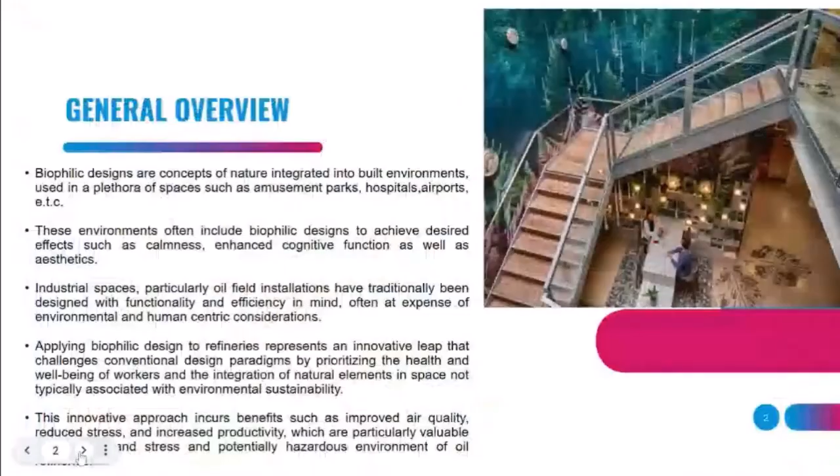So first of all, what are these biophilic designs? Can everyone hear me? Sorry. Biophilic designs are generally concepts of nature which are integrated into built environments, and they are used in spaces such as hospitals, schools, airports, homes, and hotels. These environments that include biophilic designs are used to achieve a desired effect, aside from creating or enhancing the aesthetics of the environment.

They also bring effects such as enhanced cognitive functions, calmness, and reduced fatigue. So incorporating these designs in industrial spaces is actually unique, not exactly common. We want to fill that gap because we believe that by applying biophilic designs into these spaces, it helps workers who are usually faced with repetitive and strenuous tasks.

To also experience these calming effects and enhance cognitive functions, which is necessary in their work, and also to help the environment in a sustainable manner. So incorporating this into refineries, we are challenging the traditional design paradigms by putting the health of these workers at the front line. This innovative approach helps us improve the air quality and increase productivity by enhancing their cognitive functions. They are particularly valuable in potentially hazardous environments such as these oil field installations.

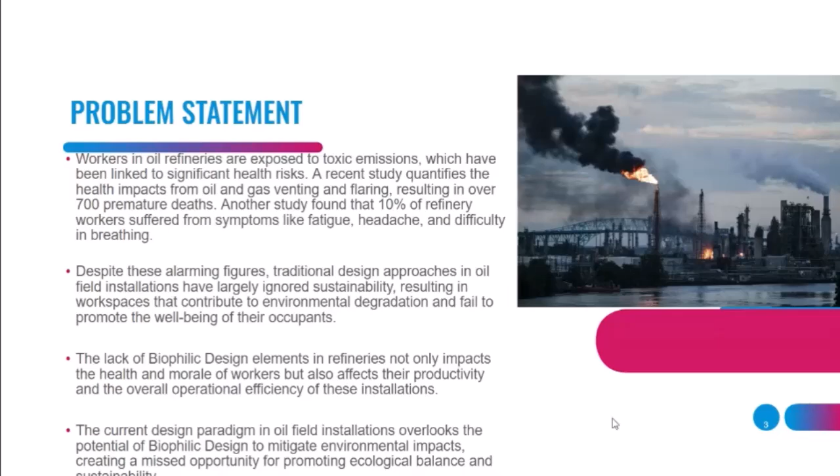We could incorporate biophilic designs, which is a way of bringing organic architecture into the oil patch, increasing the health and morale of workers, letting them see a reason to come to work happy, not just for the salary. This design will also help mitigate environmental impacts and create a good ecological balance and a sustainability effect. Then for our objectives...

We'll conduct extensive literature review, which has given us insight to integrate these designs into existing oil refineries. Our second objective is to improve employee health and productivity, reduce environmental impacts of air pollution, and also enhance the visual aesthetics of the environment.

Is it Pattern 7, which is connection with natural systems? Is it Pattern 12, refuge, prospect, mystery, and the rest? Once we determine that, we'll move into our design and implementation. Then after implementation, we will monitor and reevaluate.

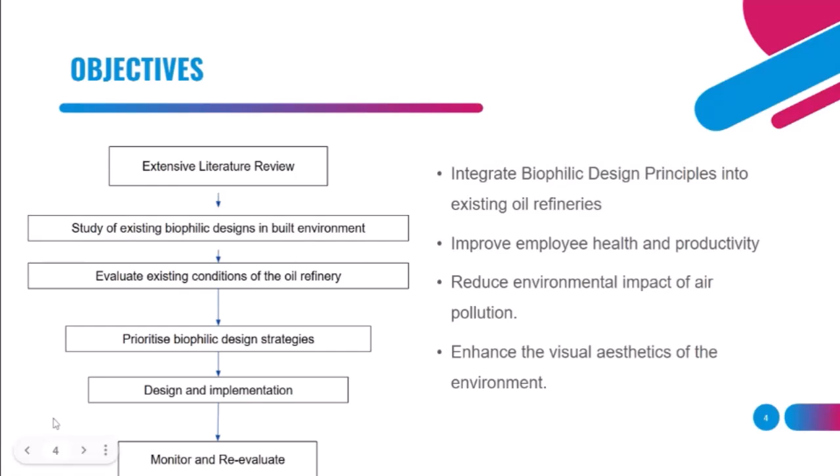According to the reviews and research we've done, we've seen that biophilic designs are built most especially into homes, hotels, hospitals, schools, amusement parks, airports, and offices, but they haven't actually been implemented into facilities like industrial facilities. This is the gap we hope to fill.

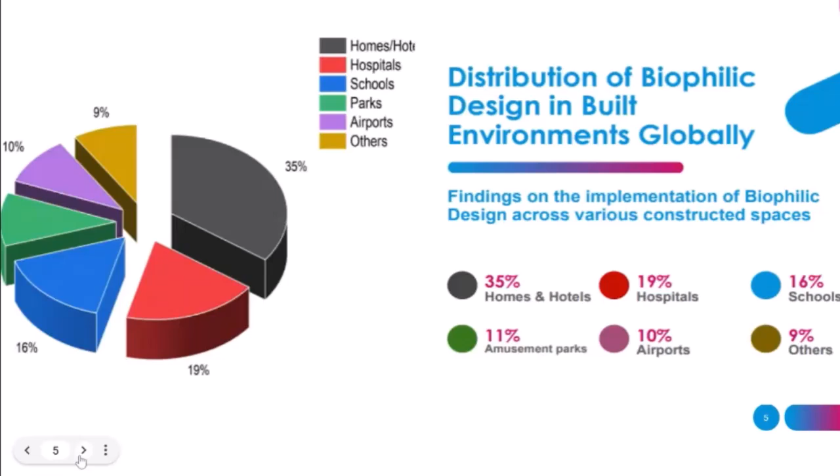You can see the pie charts whereby there's an uneven distribution of the integration of biophilic designs into these already built spaces. So my partner is going to take us on this integration and why we are going to integrate this into oil field installations.

Naya? Yes, thank you very much, Chiwetalu. So I'm going to be speaking on the drawings here. We are proposing to integrate biophilic design, focusing on P1, which is visual.

Examples of those indoor spaces include cafeteria, resting room, and conference rooms, and examples of outdoor spaces include the walkways and the drive-throughs. For indoor spaces, we propose to use allergy-friendly plants indigenous to the ecosystem in that environment. For outdoor spaces, we propose to use plants with high air pollution tolerance capacity, which can serve as carbon capturers and sequesters, and also enhance the aesthetics of both outdoor and indoor environments. Thank you very much.

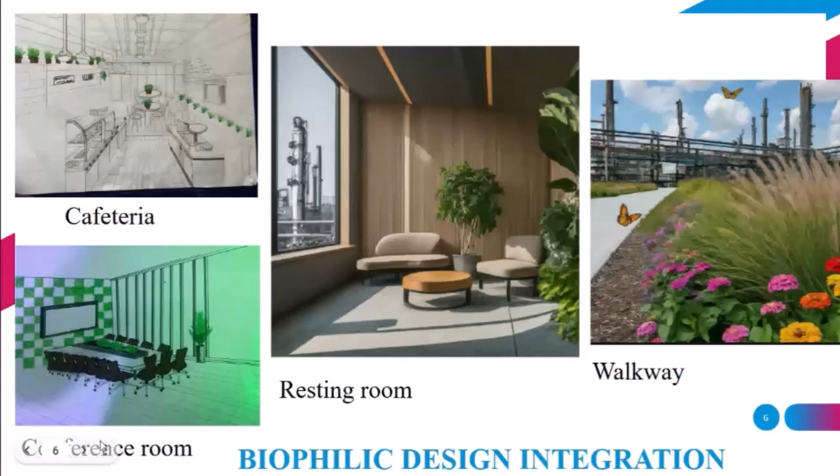Okay, so I'll take it from there. We have the key beneficiary of this research, which are the employees, by helping them in their health and enhancing their cognitive functions. This will also be enhancing the environment.

This benefits companies who want to maintain their environmental reputation, so they wouldn't want to be seen as people that destroy ecosystems. This will also be beneficial to the community in that environment by making them inclusive, bringing the indigenous plants to help enhance the greenery of both indoor and outdoor spaces.

Our relevant sustainable development goals: our research resonates with 4 major SDGs, which are SDG 3, 11, 13, and 15. SDG 3 talks on good health and well-being, which are very crucial to the workers working there. It also enhances sustainable cities and communities, encourages climate action, and encourages life on land, which also encourages biodiversity. Thank you, everyone.

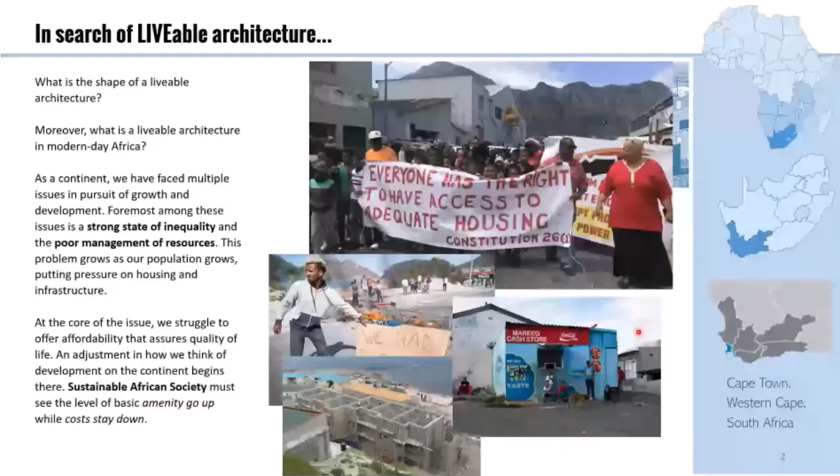So the issues endemic with inequality revolve around differences in engagement levels, differences in inclusion. There's a level of difficulty in accessing health and security. And of course, integration is extremely difficult if you are starting off in different areas and at different levels of accessibility.

And of course, there is a lower willingness to invest in an area that has these issues. So we need to look at a shift from a shallow ecology, where man is above the environment and there is a reliance on technical solutions and the management of the environment as an administrative task.

Instead, we need to look at a deep ecology where man is part of the environment and has veneration for life, all life, and attempts to achieve a complete symbiosis.

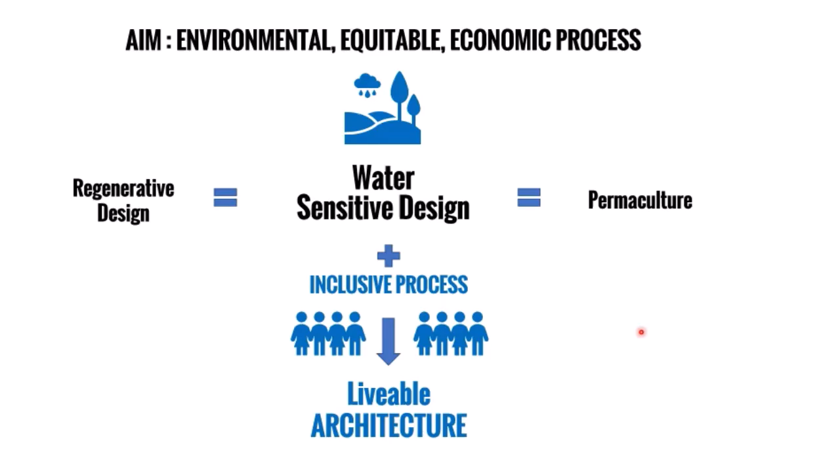So with that aim in mind, towards an environmental, equitable economic process, I managed to identify water-sensitive design as part of permaculture, part of regenerative design, but with the addition of inclusive processes, we can then achieve a more livable architecture, a livable approach to architecture. And this is a diagram where I look at theoretically how livable architecture would sit within.

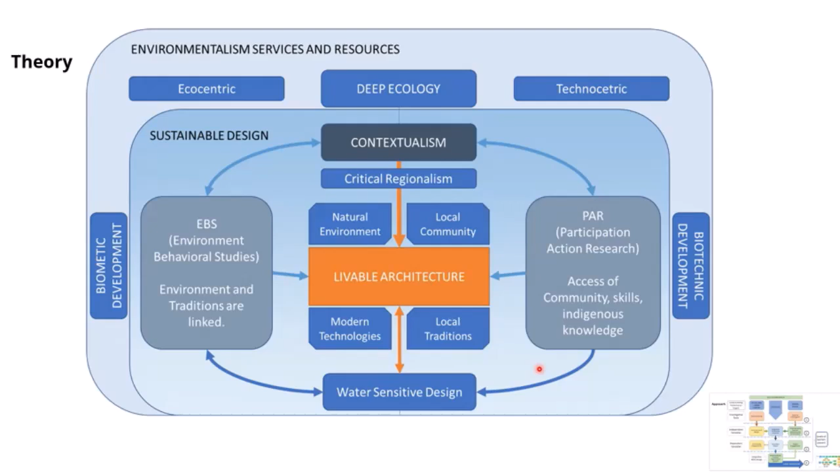It is something that I imagine is easily connected to water-sensitive design, environmental behavioral studies, and participation action research, but it kind of sits at the junction of all of these elements while being critical to the region, and of course speaking to the natural environment, local community, modern technologies, and local traditions.

And the approach that I took, the methodology adopted, was to look at four steps towards a livable architecture, where water-sensitive design is a key driver.

To get to that point, I looked at understanding the performance targets present in media and literature reviews. I looked at investigative tools such as baseline investigations and data gathering. I looked at independent variables, and then dependent variables, which were community engagement and expert engagements.

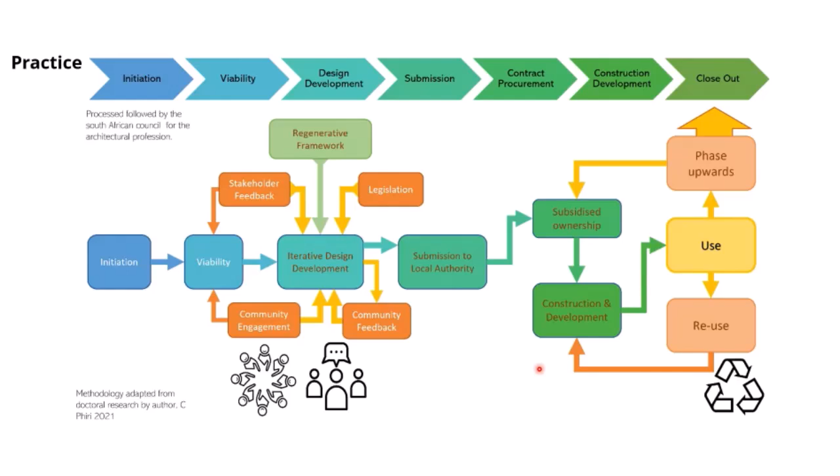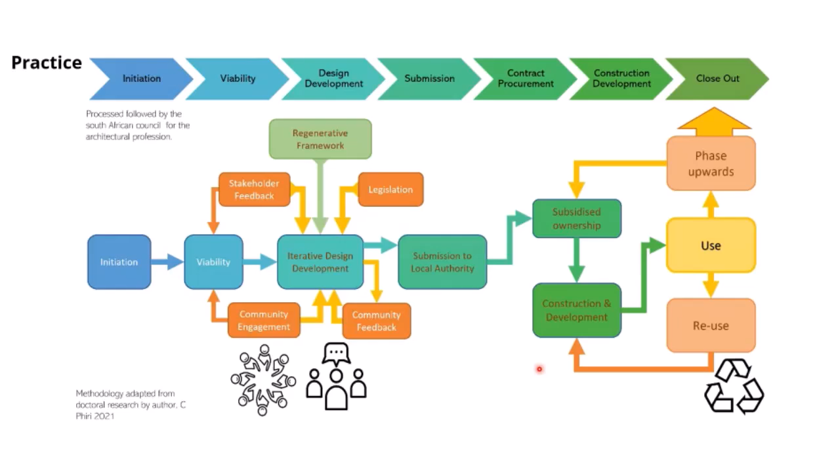That took the form of a redefinition of practice, and how you can move from initiation to closeout traditionally, versus how you can move into initiation, viability, and iterative design development, using community engagement to reframe how to approach design. I also looked at how that could lead to a circular economy and how you can get into use, reuse, and phasing upwards of design.

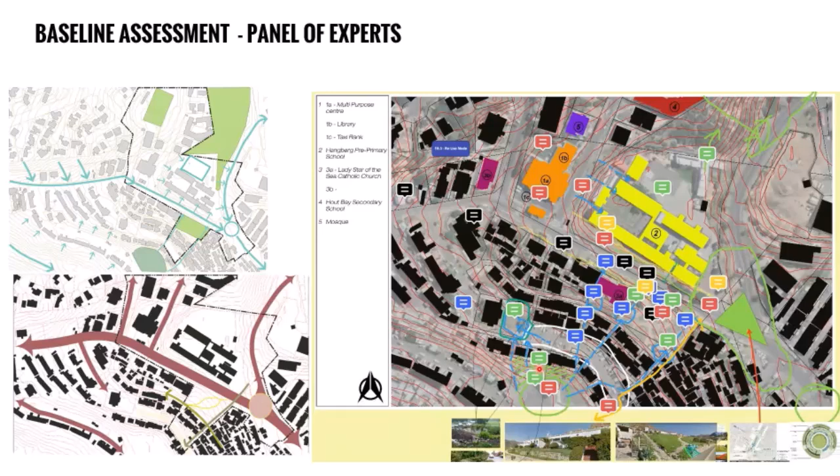We then got a panel of experts together, and there was a discussion over the different elements of the area that could benefit from water-sensitive design, as well as identifying areas that were important and areas that could be linked with intervention.

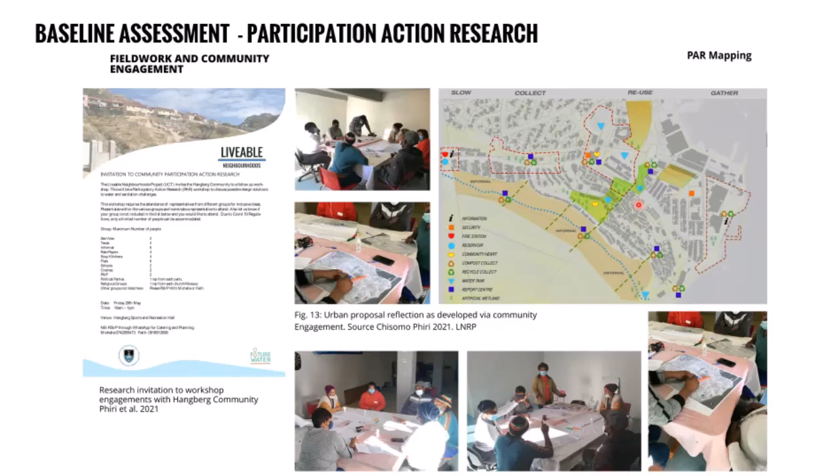I then engaged with the community, well, with residents and members of the area. Together we managed to create a revised diagram that looked at all the different levels of engagement with the area. That took this shape, where we looked at layers of information, security, fire.

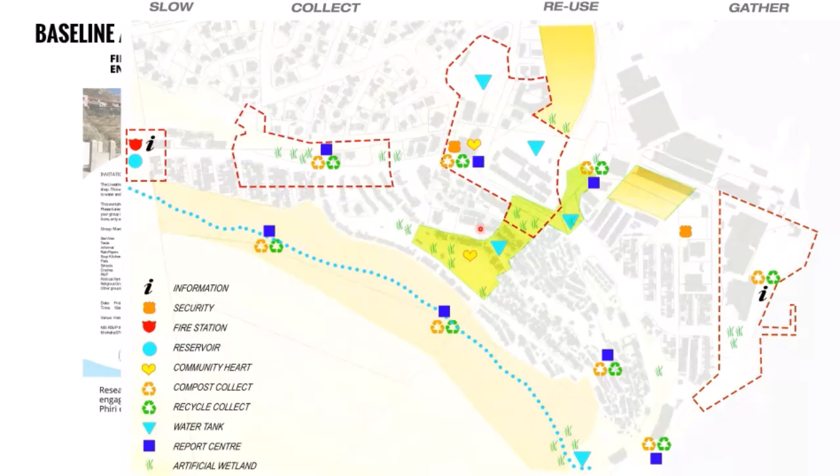We looked at the possibility of implementing fire stations and how that could be received. We looked at opportunities for reservoirs and community, and identified where the community would center its activities, and then we looked at recycling methods, water retention methods, and possibilities for artificial wetlands in the area.

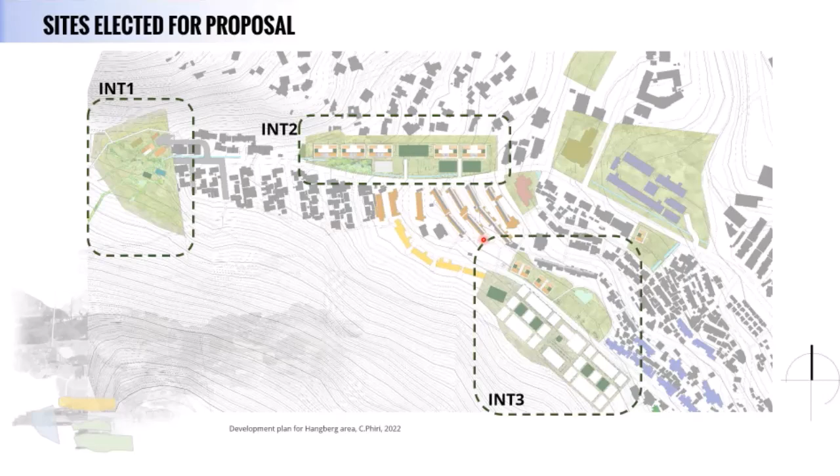That resolved itself into a series of proposals, which I named Intervention 1, 2, and 3. Intervention 1 is a complex system that connects to the environment as a threshold intervention.

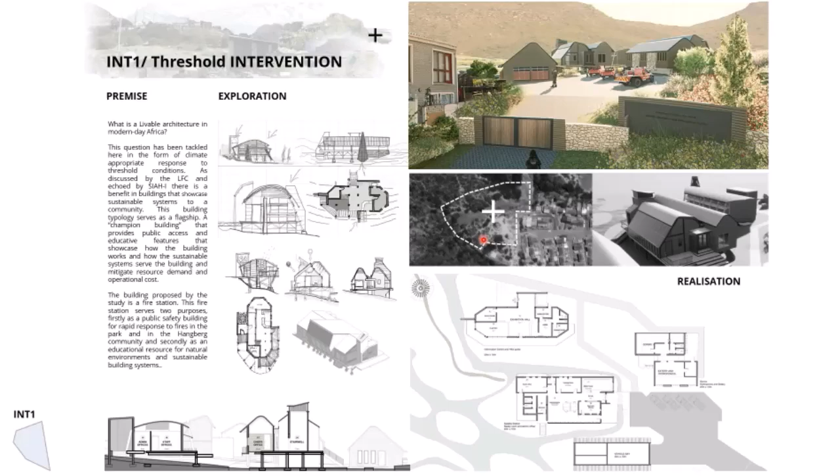This threshold intervention has an information center, a satellite fire station, and how those systems would work with a dormitory to allow for training as well. This was designed as a building that would touch lightly on the environment and would integrate sustainable systems and sustainable materials, so you can consider this a flagship for the project.

I'd imagine this as something rolled out as phase 1. And then we would move into phase 2, where there would be transitional interventions, allowing people to move into these buildings that would be phased up.

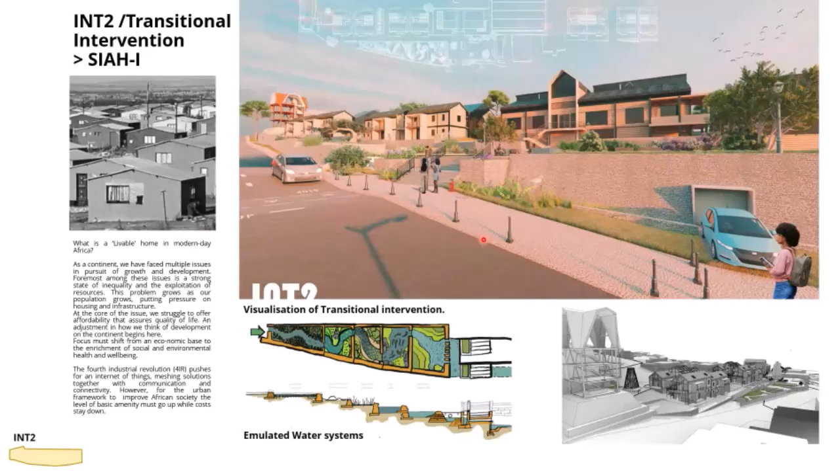These are called the SIAH-I livable units. Those units, identified in yellow in this diagram, would have a series of levels that can be integrated and developed depending on the use of the family that's involved.

This district was also allowed for an activity hall and a youth center. These were programs identified by the community as things they needed, things that would benefit the area, as well as a police station with an observation tower that also acted as a green agricultural intervention.

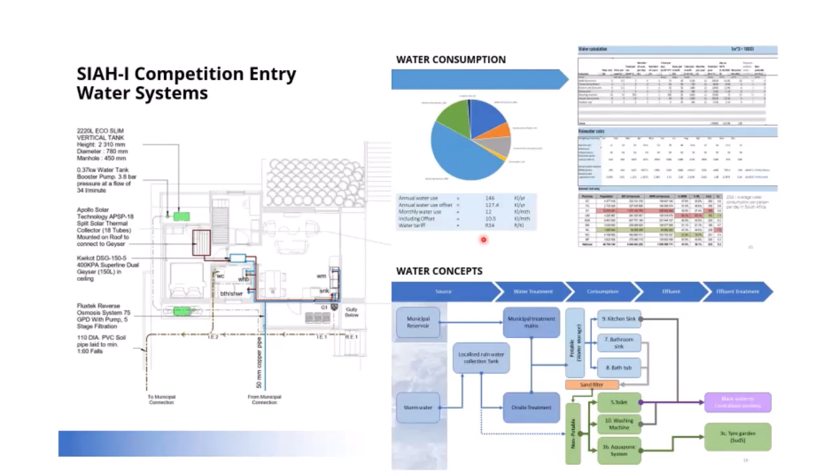The SIAH-I livable units have 3 phases, as you can see here. These are the systems in use, where we quantified the amount of water retention as well as the water administration, how much savings could be calculated in one unit, and then how that could be carried forward.

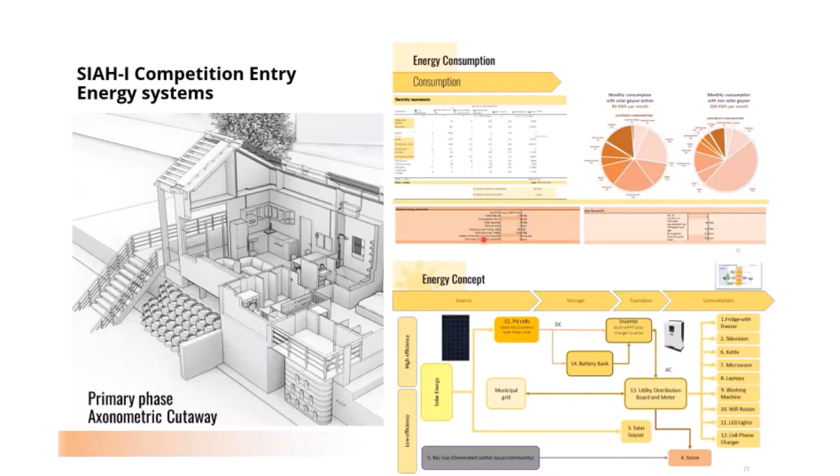The same was done for energy, where savings were identified in terms of using a solar geyser as opposed to not using one, using a centralized system so you cannot rely on existing power systems. There was also identifying public buildings as energy sources for the entire district. This is an analysis of the sun hours and kilowatt hours of exposure present on the youth center building, which would then act as a power generator for that area.

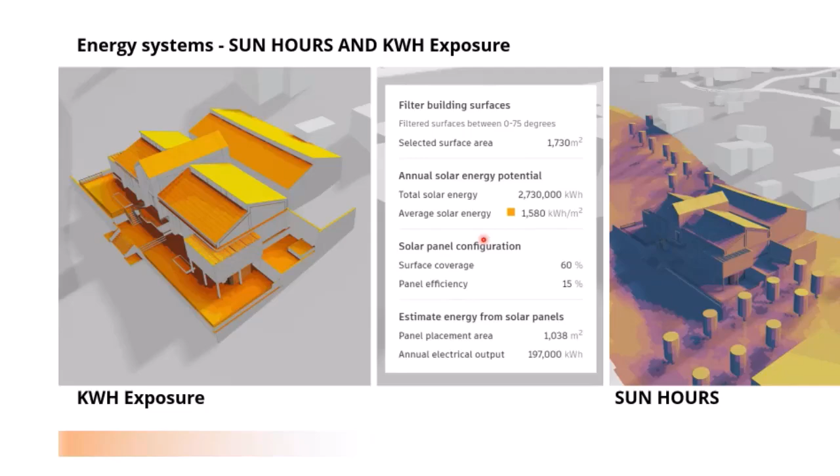That got taken to the next level, which is Intervention 3. Here we looked at maximizing the area and developing high densities, trying to ensure the highest number of people could benefit from generation and water treatment.

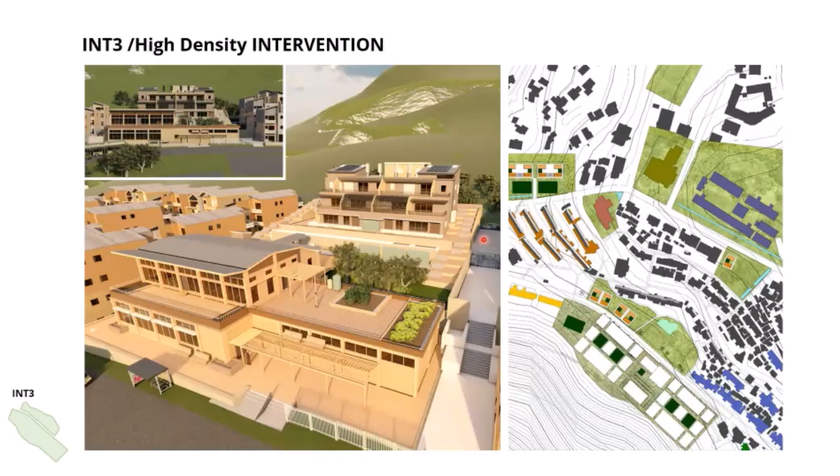These are diagrams describing how that would be achieved in the mixed-use central system, which is this building over here. You can see it here in section.

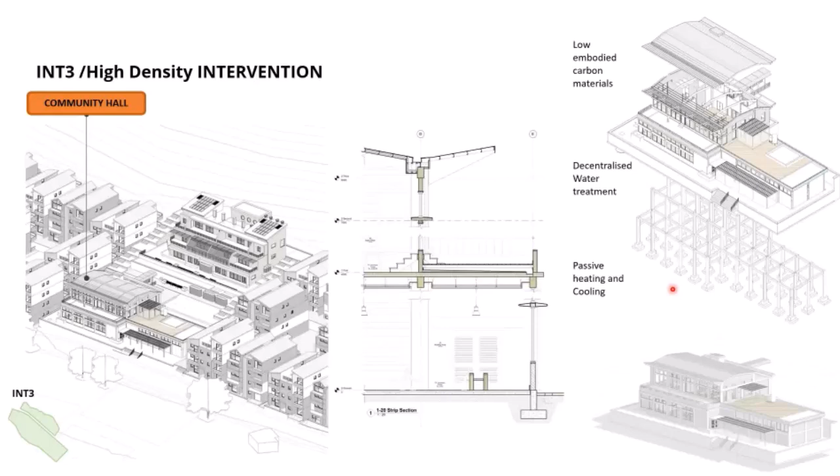That was then communicated into the community hall, which focused on using technologies creatively, using low-embodied carbon materials like timber and low intensity brick, as well as passive heating and passive cooling, and decentralized water treatment situated within a centralized water system there.

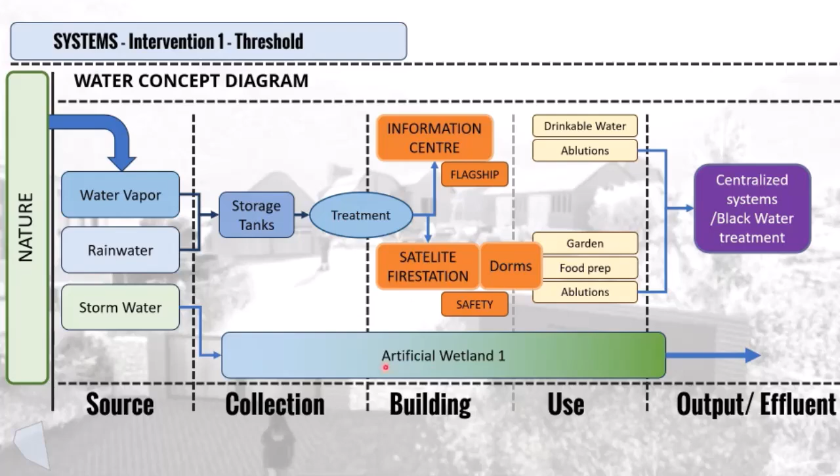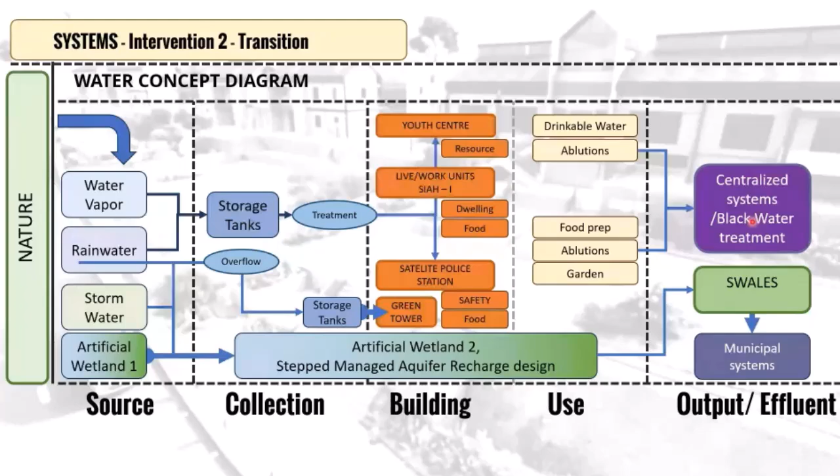I've also got water concept diagrams that talk about how these intervention systems would work cohesively from source, collection, building utilization, and then output effluent. These systems would connect to one another and would eventually find their way back into the natural environment after being treated and run naturally through a series of systems of aquifers and swales.

And this is how all of that comes together.

In conclusion, the key findings were that there are two sets of barriers in the way of implementation of water-sensitive design in low-income areas. The first set is established systems — we rely on convention. Financial barriers are present, as not many people understand how to financially motivate such a program.

There are social perceptions that this system is expensive and impractical, because of the amount of change and innovation that would have to take place. There are also technical operation barriers and existing policy that seem to be in the way.

However, that perception is the core of barrier set number 2 — a perceived cost of construction, perceived cost of conversion, and a perceived difficulty in adaptation, when in truth, once implemented, these systems could feed into a rolling forward of improvisation and innovation.

So in totality, the research found that there are barriers present, and for us to get to a water-sensitive, livable environment, we would need to overcome these barriers and find a way to engage in sustainable practices while addressing these issues for people to buy in and accept the changes.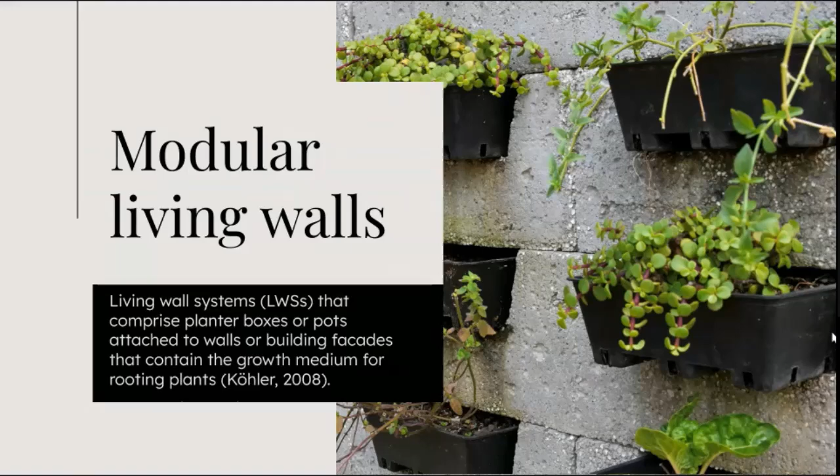First I need to clarify two definitions. The first is modular living wall systems - these are living wall systems that comprise planter boxes or pots attached to walls or building facades that contain the growth medium for rooting plants. Then African vegetables are green leafy vegetables that are naturalized and adapted to Africa or selected for their local conditions. The SDGs I looked into was food security mainly, but we cannot look at food security in isolation.

Climate action impacts on food security. Over the last two decades, the global climate has changed in such a way that it's affected all of our lives. Climate change impacts the prospects of achieving all 17 of the SDGs, either directly or indirectly, and especially food security. There's a link between food security and no poverty, and also responsible consumption and production, proved by research. I also explored good health and well-being, gender equality, decent work and economic growth, sustainable cities and communities, and life on land to have a two-way link between ending hunger and reducing food insecurity.

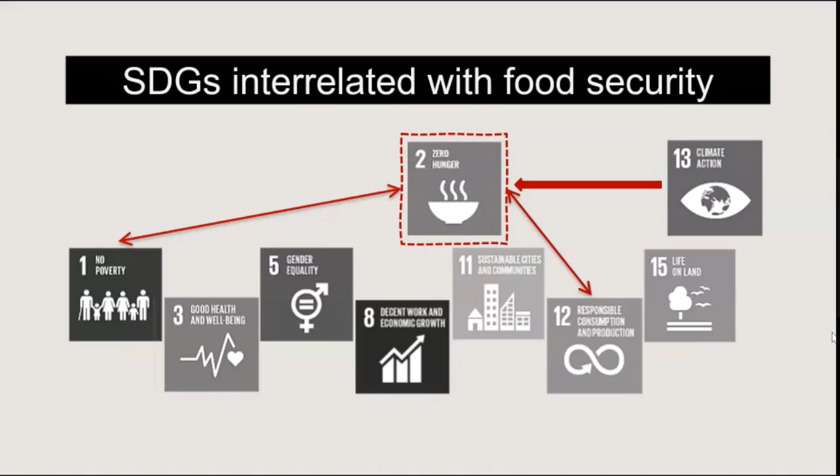Due to the increasing atmospheric carbon dioxide levels over the last years, we experience extreme climate events with substantial economic losses for most global economies. The changing climate conditions impact food supply and productivity, and especially in Africa, climate change has a devastating impact on food security. This contributes to growing food insecurity and poverty.

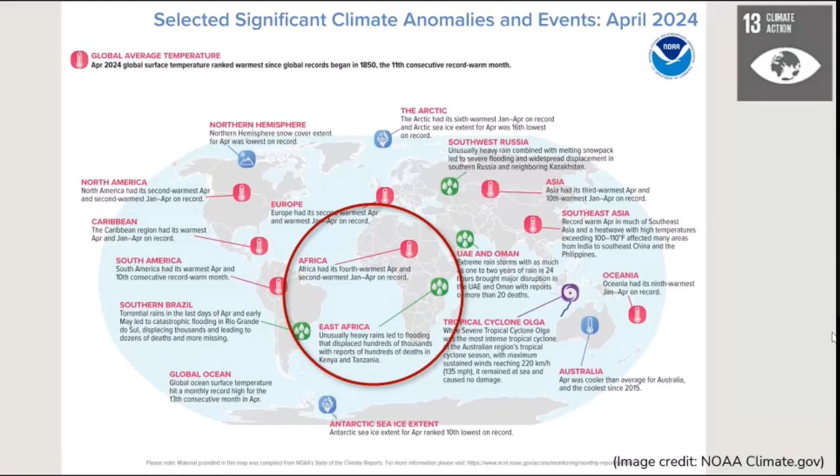Looking at the South African population, there was a 1% increase from 2023, with the population currently standing at 62 million people. The Gauteng province dominates internal migration, with more than 2.4 million international migrants from the SADC region. Approximately 55.5% of the South African population is living in poverty, with a total of 25% experiencing food poverty. These issues intensify food security and the related SDGs.

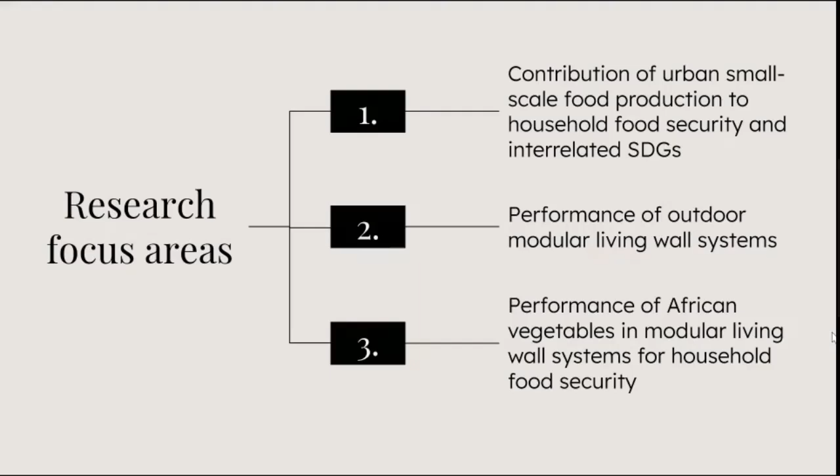My research focus areas were: number one, the contribution of urban small-scale food production to household food security and interrelated SDGs; two, the performance of outdoor modular living wall systems as edible green infrastructure; and three, the performance of African vegetable crops in modular living wall systems for household food security.

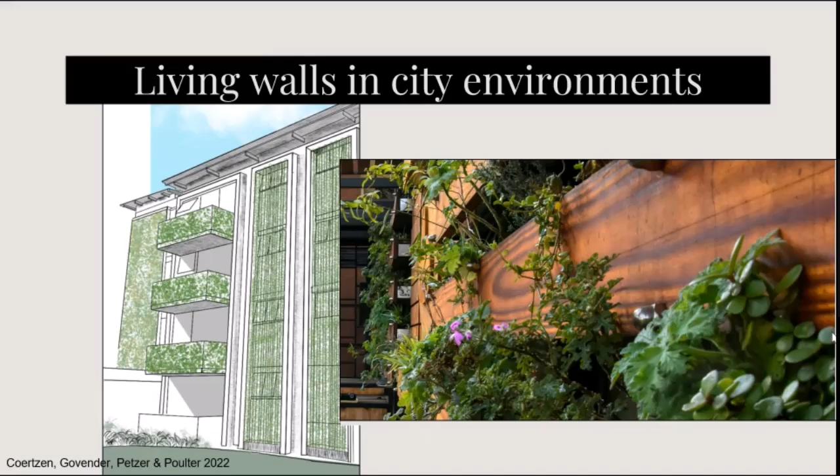Looking at focus area 1, food security and related SDGs - in inner cities, the potential area for facade greenery is almost double the footprint of buildings. That's why I looked at living walls. Living walls offer ecosystem services which are vital to sustainable cities. If we incorporate small-scale food production in living walls, we can address food security, cooling, reduce carbon dioxide, provide habitats, and benefit our health and well-being.

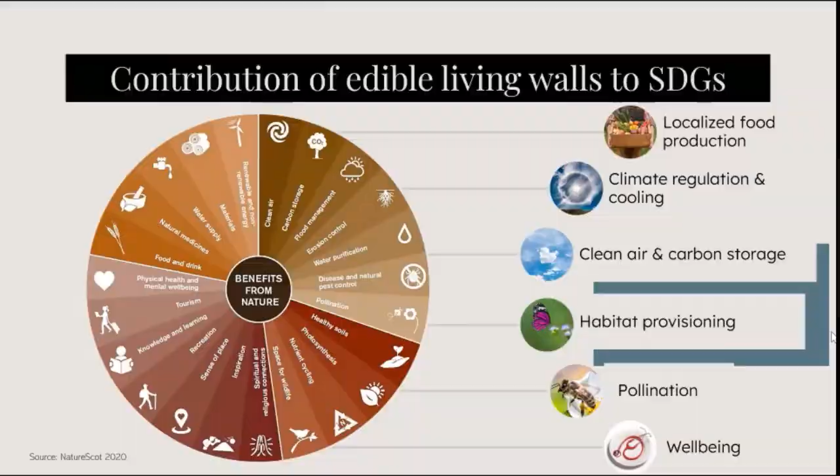Then looking at focus area 2, the living wall performance - current challenges with living walls show high initial costs, and maintenance requirements outweigh their benefits in total. They are not resilient, with a restricted planting palette to survive the stresses of an urban environment.

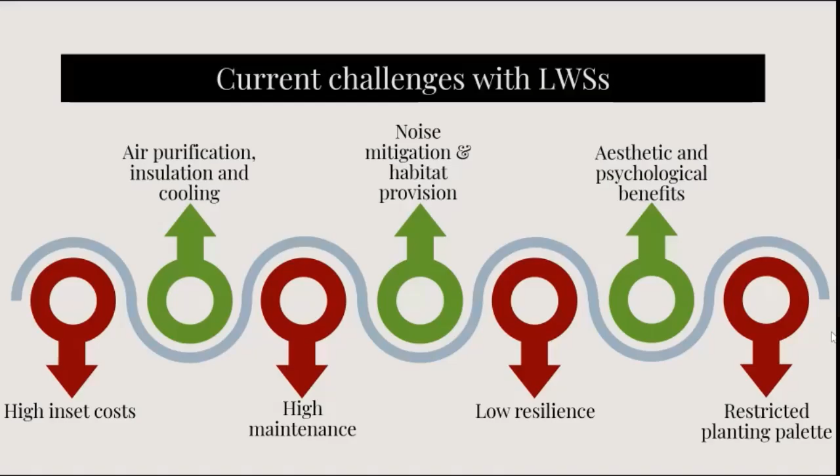Then area number 3, African vegetables. The global food system relies on only 30 crops now for the nutritional requirements of the human population.

This makes our food systems very vulnerable to climate variability, especially in developing economies like sub-Saharan Africa. So the human population will be more vulnerable if one of these crop species falters due to climate change.

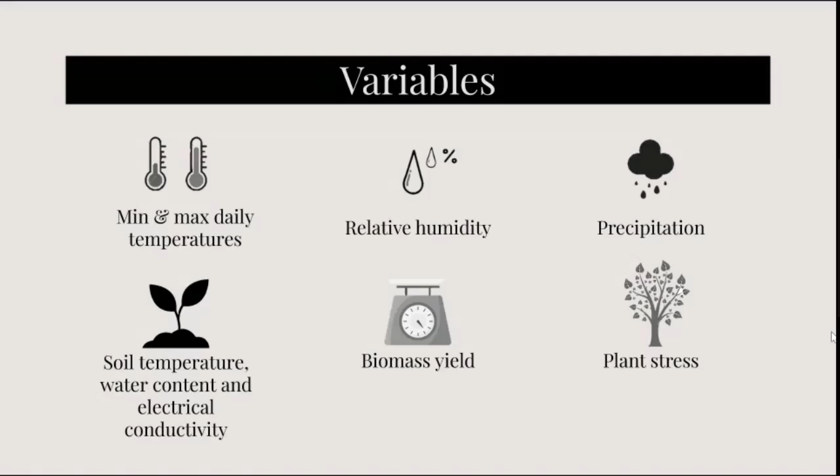I looked at various variables. I compared the biomass and plant stress for the different typologies and the crops. My other variables include minimum and maximum daily temperatures, relative humidity, precipitation, soil temperature, water content, and electrical conductivity. And then I analyzed the data statistically.

Going into the conclusions, in addition to the biophilic benefits, living wall systems with African vegetables as an urban agriculture solution offer ecosystem services. They can therefore be considered a sustainable food system option to address food security and related SDGs globally, and especially in the sub-Saharan African environments. These sustainable urban agriculture solutions, such as living walls with African vegetables in marginalized communities, such as sub-Saharan Africa, can contribute to food security and the related SDGs.

The second finding from my study was that outdoor modular living walls with African vegetables can contribute to local household food security as edible green infrastructure in urban environments. I specifically looked at Gauteng, but it can be applied in many countries.

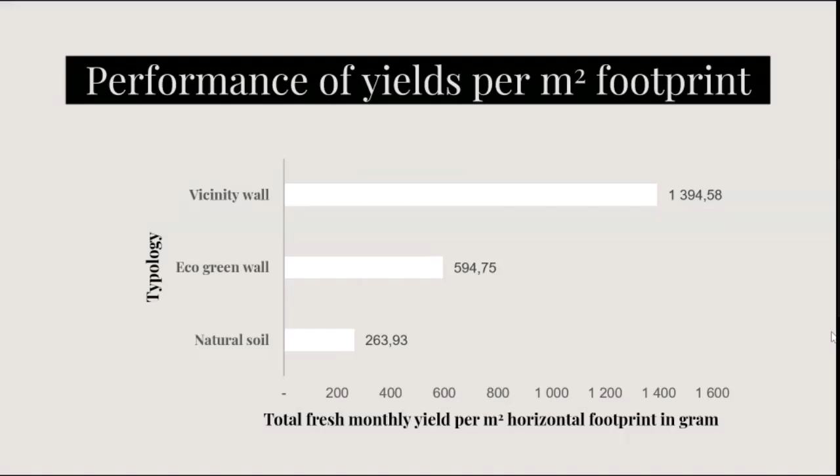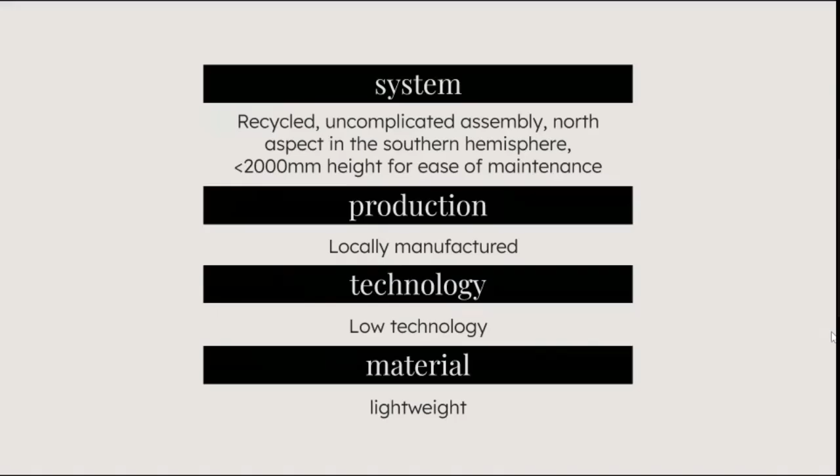Then looking at the performance of living wall systems: the system has to have components manufactured from cost-effective recycled or reused materials. It must preferably be locally manufactured. It must be a low technology system with uncomplicated assembly with robust components, and materials must be lightweight.

The study proposes plant pots with a soil volume of at least 3 liters and a depth of 200 millimeters. This is important because it increases the yield and reduces the plant stress. Selecting suitable crops increases the crop performance, resilience and social benefits. The soil must also be suitable for the crop requirements.

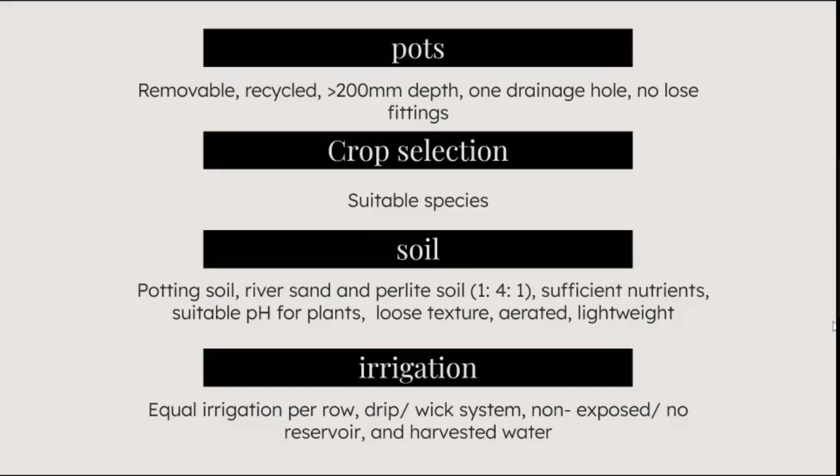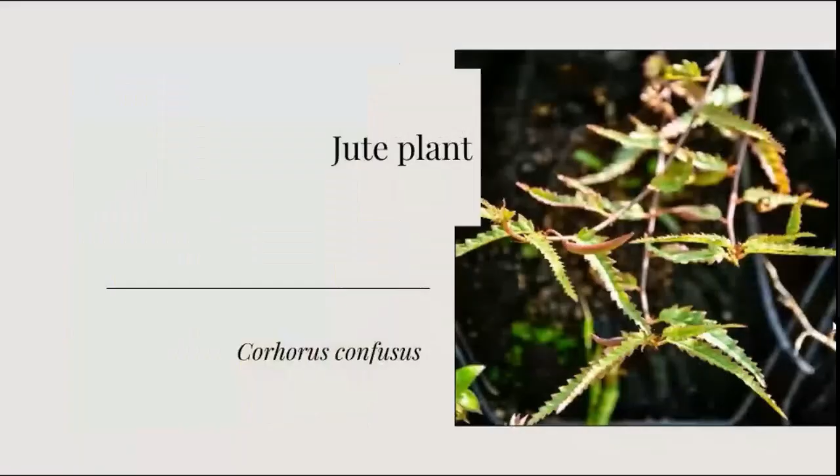Then a basic drip irrigation system must be provided for each plant level. This contributes to reduced costs and carbon footprint. Lastly, the system design should avoid open reservoirs and filters to reduce maintenance. Then 7 of the African crops that I looked at showed potential, and due to time constraints, I'm just going to flash through them quickly, otherwise I will exceed my 10 minutes.

Thank you very much.

Come on, thank you very much. Excellent presentation, Karen. Excellent presentation, excellent solution. Thank you very much for the awesome presentation and solution to our environment. Again, this is another solution that is also profound to us. This is what we are advocating for, to see around the world at World Technology Partners, right?

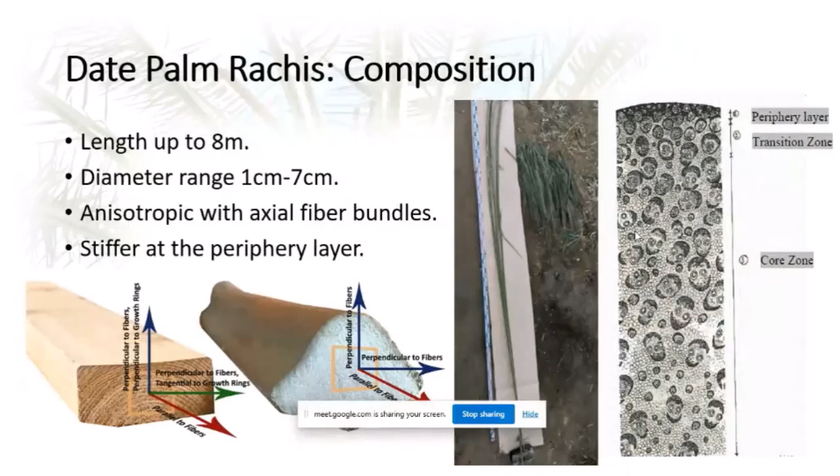Now, let's look more closely at rachis. A rachis is the long rib flowing along a palm leaf with a length up to 8 meters and a diameter range from 1 to 7 centimeters.

Fiber bundles extend along the rachis without much interlinkage in between, and the bundles are the densest on the outside, which explains why rachis is traditionally used without peeling to preserve its strength.

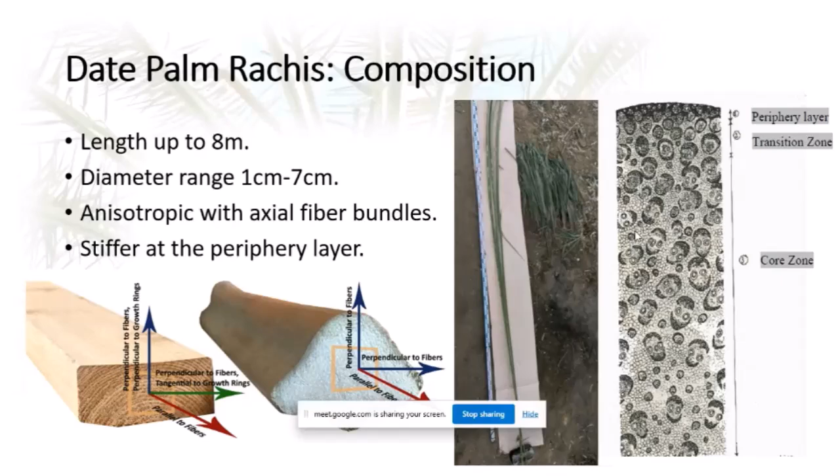The fibers being the sole medium to channel the forces makes the strength in the longitudinal direction far superior to that in the perpendicular direction. This is the main issue we must consider in any design concept that uses rachis.

So we'll need to look for a structural component that has the ability to transform all moments to axial stresses, so the fibers can carry them efficiently without failure.

Such components include trusses, which use hinge joints and bracings to eliminate moments. Moreover, shaping an arch to be parabolic transforms all stresses on it to pure axial compression.

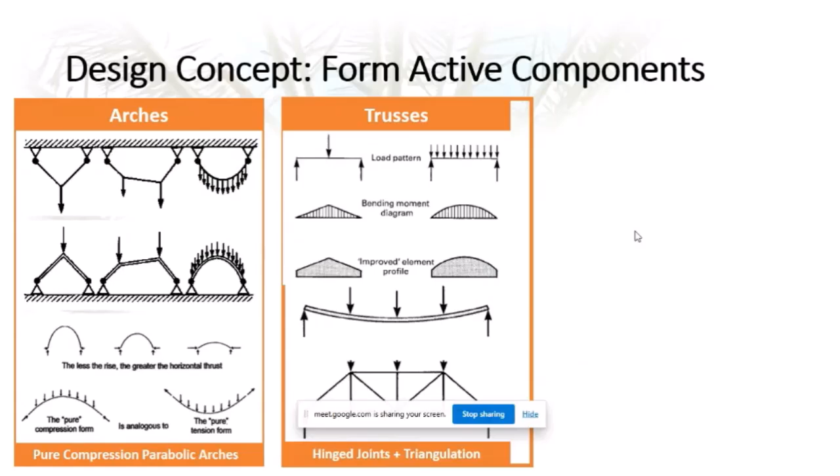So we thought, what if we begin with a truss and then arch it into a parabolic truss, so everything on it is axial compression.

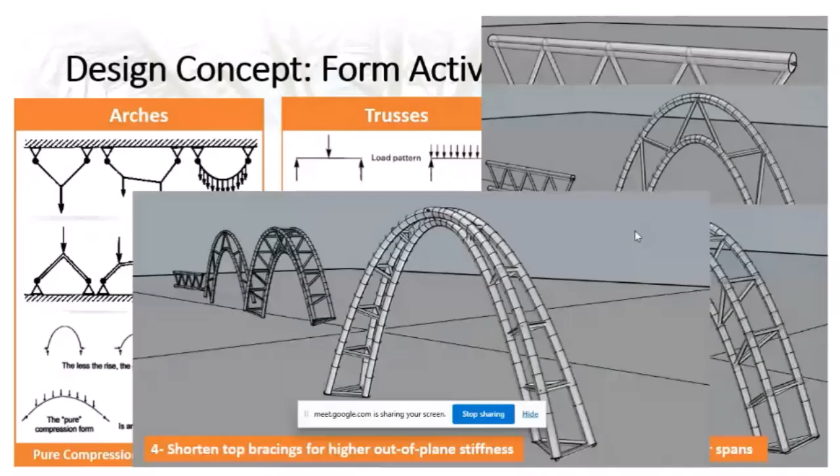Then make it into a space truss to have higher strength and wider spans. Then shorten the bracings at the top for higher stiffness and lengthen the bracings at the base for higher out-of-plane stability. So this was our first concept, the tri-arch space truss.

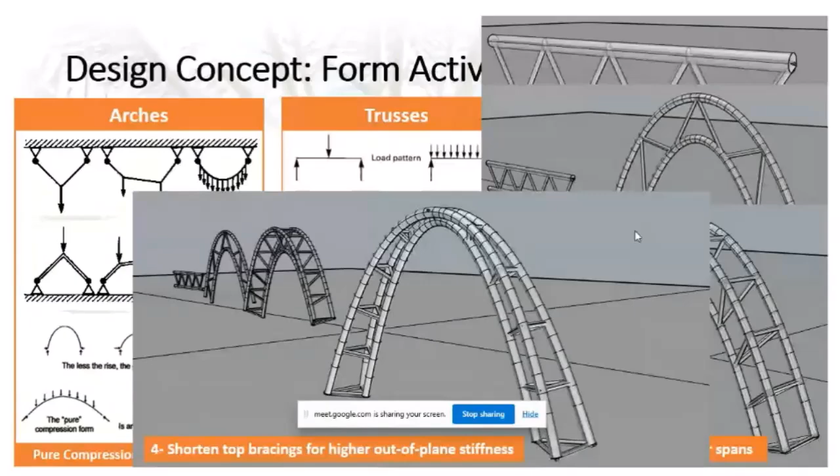And this is a maquette that we built using date palm rachis cut into scale, so we could understand more the scale of the elements to be used in bigger laboratory specimens.

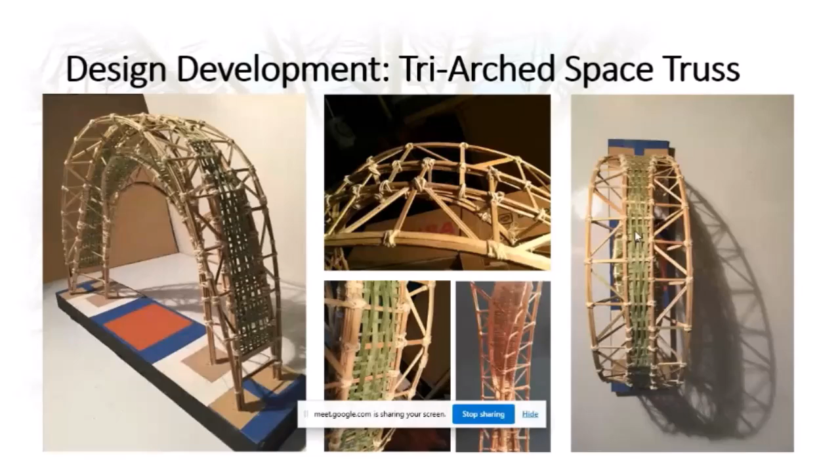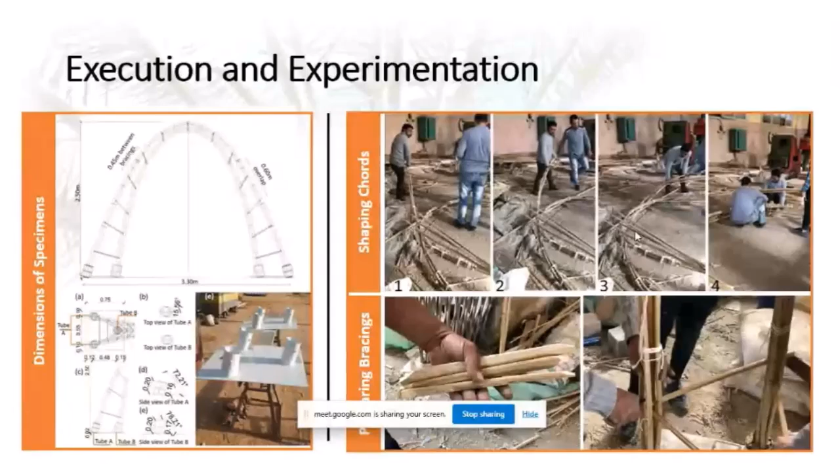And this was building these specimens. It was 1 to 3 the scale with a span of 3.3 meters. And the specimens were built by local craftsmen who enriched the design details with their expertise from the traditional handicrafts they deal with every day.

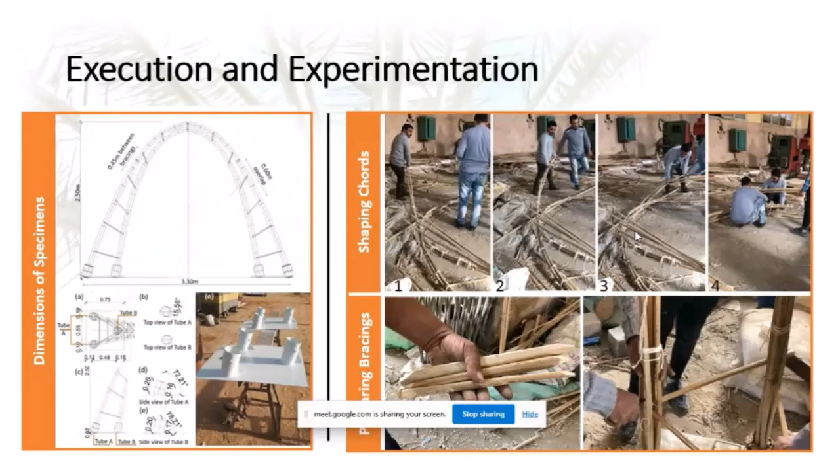And these were our 3 specimens, and each specimen was built in under 1 day, reusing members from the previous specimens, because failures were exclusive at the top parts. So every time the top parts were simply replaced, and voila, this is the new specimen.

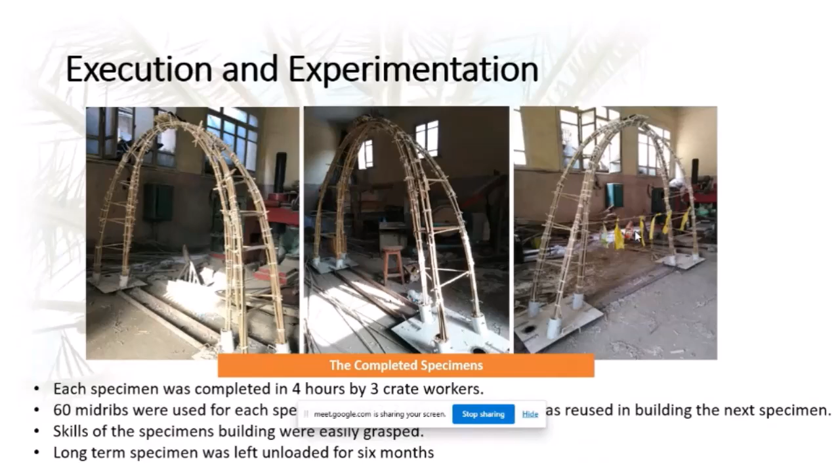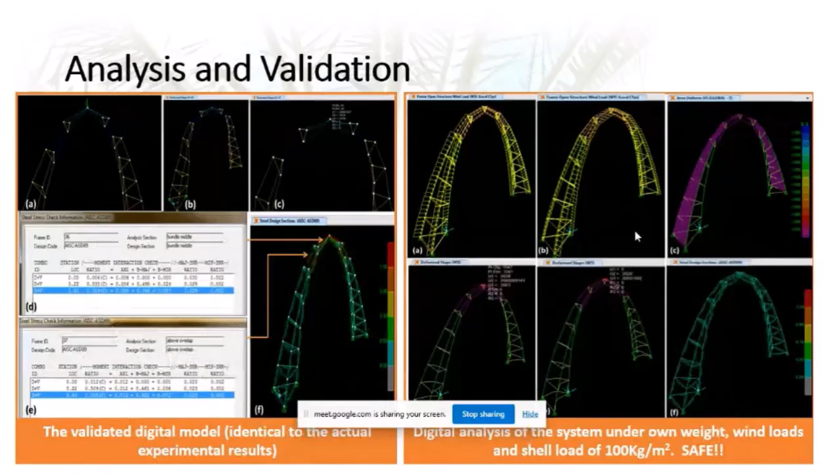In the laboratory, they showed high flexibility and safe failures. Failures were marked when we began to hear tiny cracks in the top parts, and the models popped back up after releasing the loads. The experimental behavior was compared and used to validate the digital finite element method model.

This was then used to predict the performance at the span of 12 meters, proving to be safe. And so the design, the tri-arch space truss, can be used as the main chords of light tensile structures like tents, like this, these little tents made here.

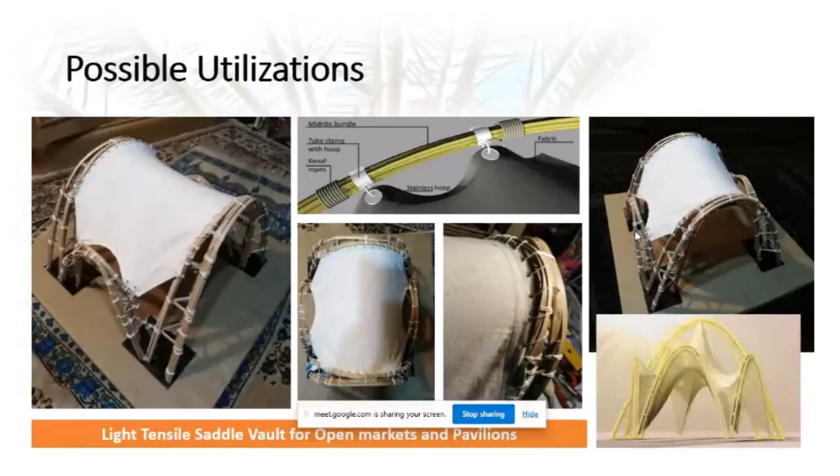Or it can be repeated in both directions and to make cross vaults with different alternatives, as shown in this maquette also, everything we made a maquette for. And each design alternative of these can be used for low-cost, fast shading structure for multiple purposes.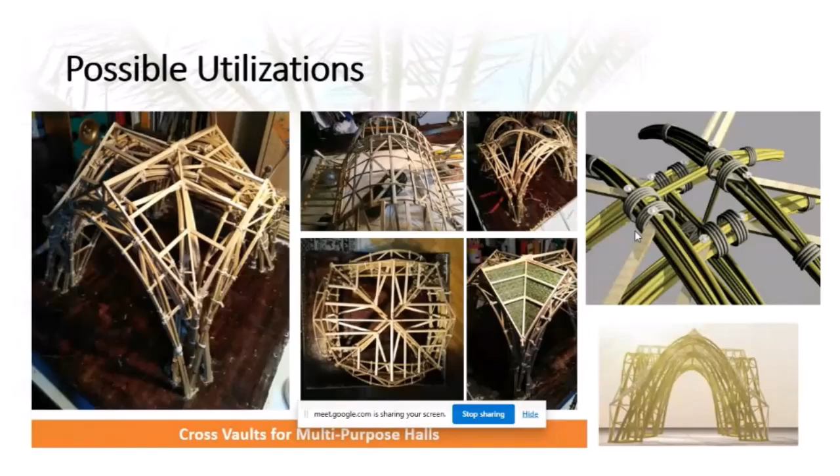But this was my PhD actually, and I found problems at implementing them to build them in the one-to-one scale, because they're monolithic structures that must be built one-to-one to actually investigate its performance. So we said, why not? Why don't we shift to a smaller assembled unit, something that employs the concept of prefabrication?

And actually, prefabrication is not too far off traditional practice. Traditional handmade furniture, like those on the left, or the fences and huts in the middle and the right, are traditional fences made in Upper Egypt and the oases in Upper Egypt.

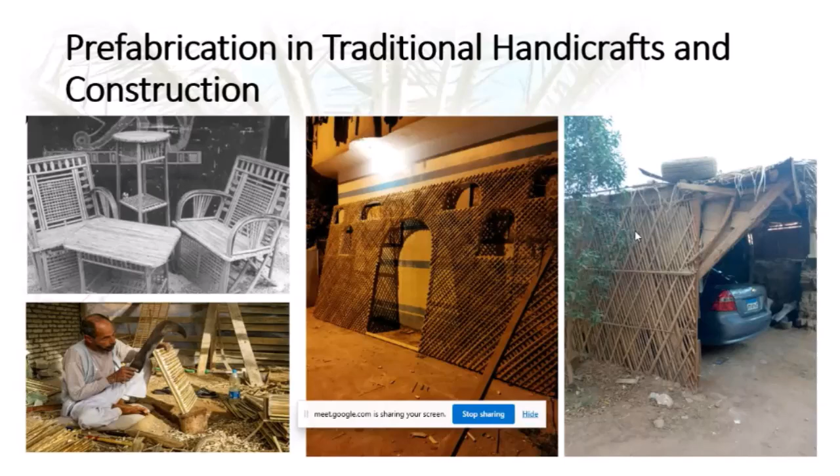And they are all made by assembling separate lattices. Each lattice of them is made separately, and then they are assembled to make the whole product. So currently, I thought about using the details of the traditional handcrafts and employing them in a new design.

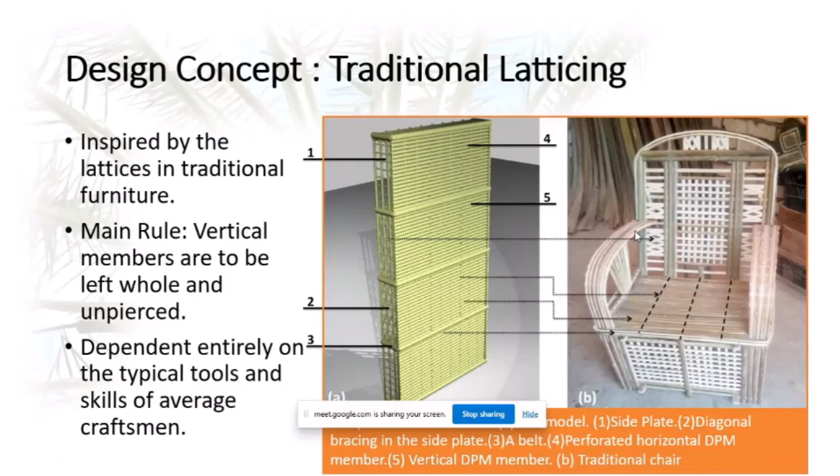The new design of a wall, a prefabricated wall panel that can be made, moved, and assembled to make a shelter or a house or whatever. So the details of the wall were inspired by details from the traditional furniture.

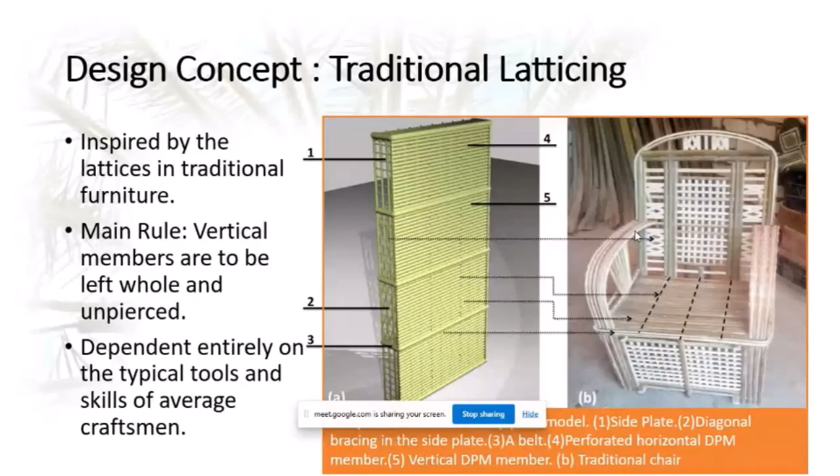And as we said previously, rachis panel must carry these loads. So the longitudinal members, the vertical members, must be left intact without any piercings, without any damage to the fibrous structure. But they can be driven through the piercings in the secondary horizontal members, as we see here.

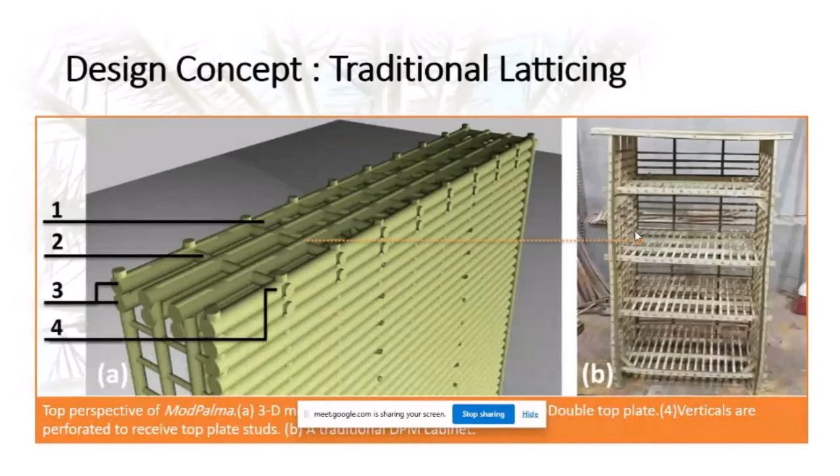And at the top of the panel, the top plate was duplicated to distribute the loads more evenly. And this is also inspired from a shoe rack made of the palm branches on the right.

And at the core of the panel, additional vertical and horizontal frames and diagonal bracings were added to enhance the stability and shear resistance. This detail was simply employed and inspired by beds made of date palm branches. Also, even the illiterate craftsman understood by nature how he must fight the shear and create some shear resistance, and this is what we learned from him.

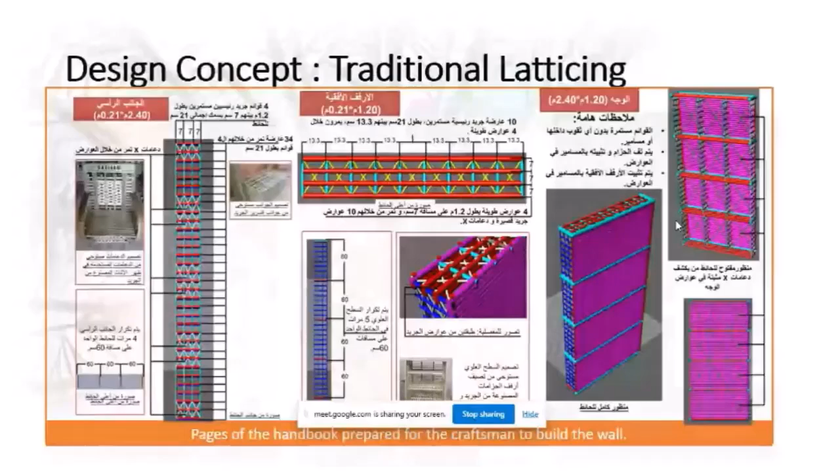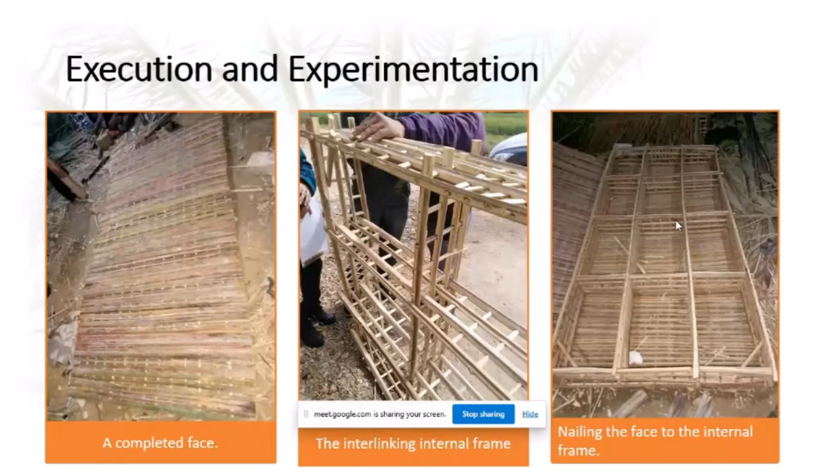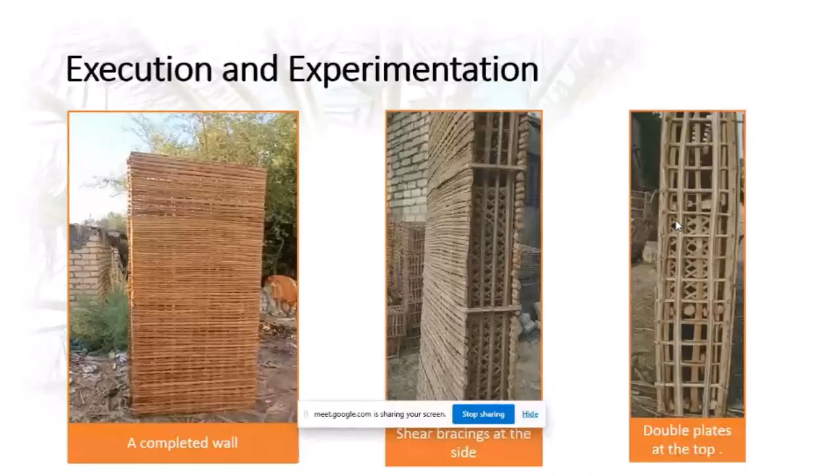And these are the photos of the completed walls from all sides. So the artistic skills of our craftsmen can obviously shine from the sides, as we see here in the middle and the top of the wall.

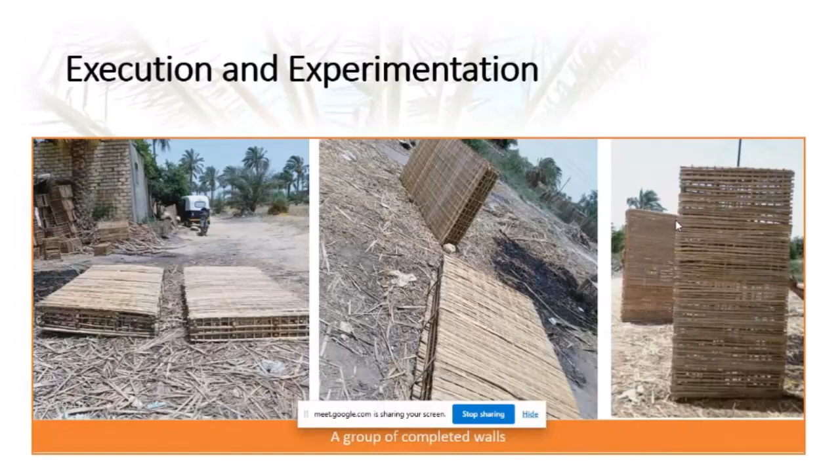We can see here also that the walls show sufficient stability and rigidity, and also the craftsmen we hired to build them admired the easy, straightforward, and fast execution process.

And using the validated properties, a finite element method model was simulated for the wall, and it showed promising performance as a wall panel and as a roofing panel.

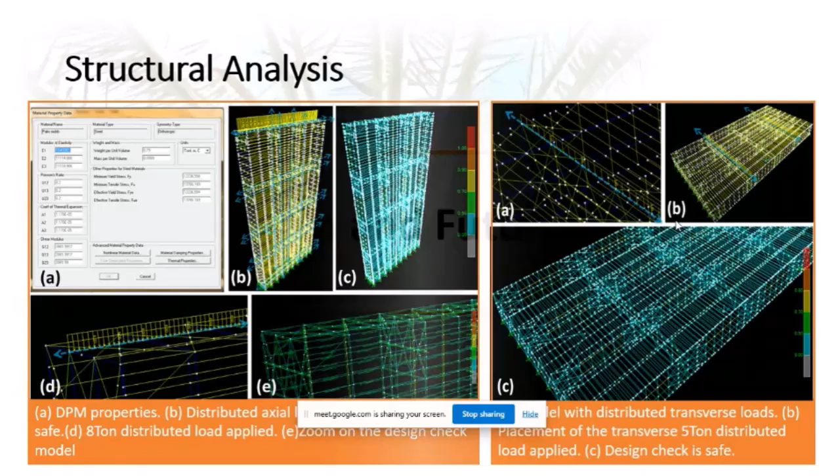So at the end of this presentation, it's worth noting that this methodology of form-active structural conceptualization can be replicated for any other long fibrous agricultural waste, such as reeds, thin branches, giant reeds, bamboo, with proper adjustments to the natural physical properties of each type.

Also, I'd like to say that this research emerges as a response to sustainable development goals.

These goals include empowering rural communities for sustainable construction that harmonizes with the very delicate nature of their environments.

It also introduces a new versatile field to reuse date palm rachis safely. This safer method saves the environment from hazardous pollutants and greenhouse gases produced from annual burning, because most pruning residues of date palm end up being burned, as only 10% are used in traditional furniture, while the rest are burnt to clear fields fast so they can be used for other things. So this is actually a better way of using them as waste.

These trials also aim to help substitute wood to fight irresponsible sourcing of extremely scarce wood forests, because in Egypt we don't have a lot of forests, and sourcing our scarce wood is dangerous to the environment. I believe this can also be said for the sub-Saharan region in Africa.

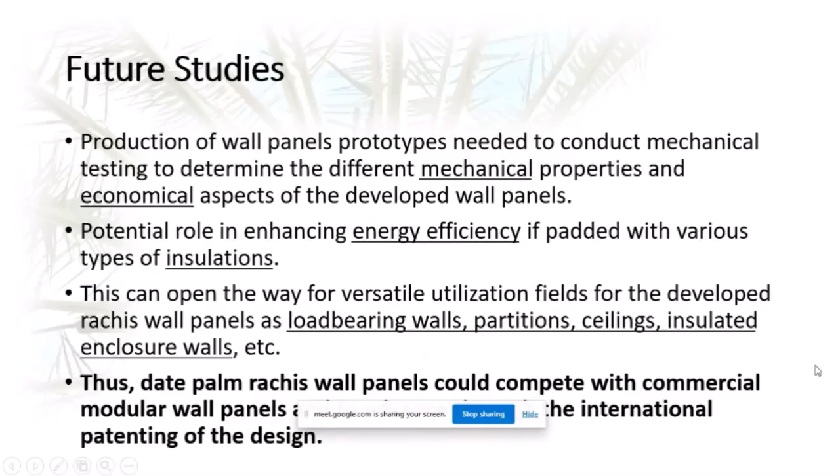Finally, I'd like to acknowledge the interdisciplinary guidance by my professors from Ain Shams University: Professor Yasser Mansour, Department of Architecture; Professor Hamed El-Mously, Department of Mechanical Production Design; Professor Amr Abdelrahman; and Ayman Mustafa from the Department of Structural Engineering. And that's it. I hope we can get in touch and collaborate soon. Thank you.